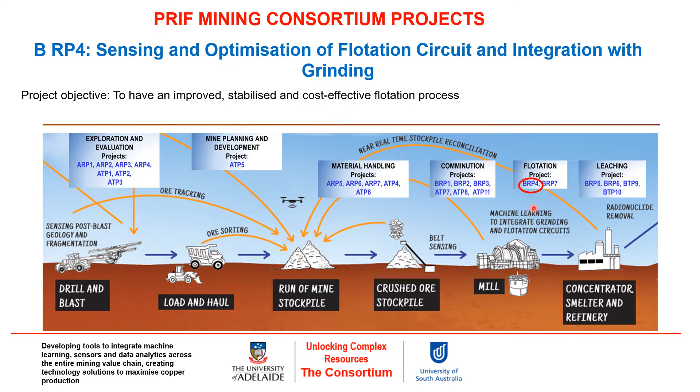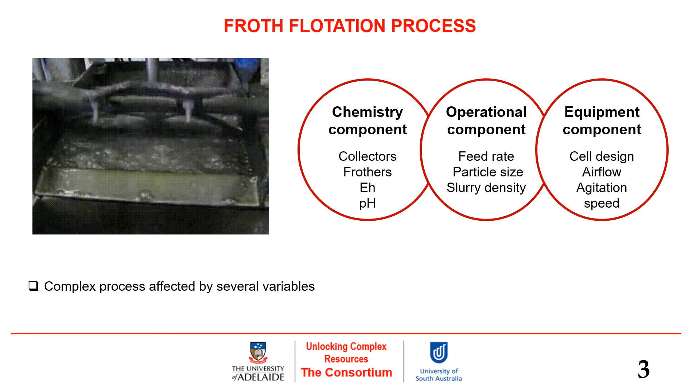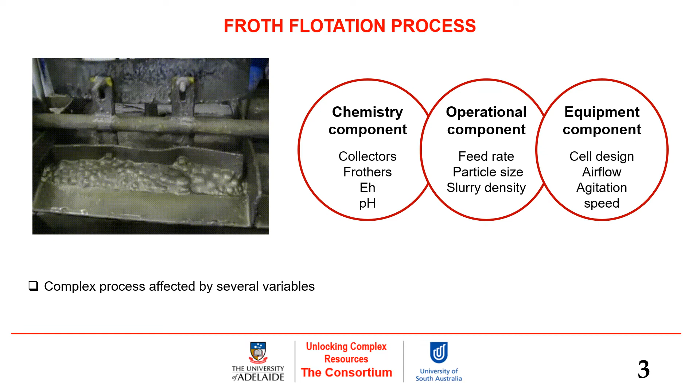Flotation has been the main separation technique that has ensured the sustenance of metals like copper on the resource market. In flotation, we are basically separating minerals based on their difference in surface wettability. No matter how simple this may sound, the process is known to be a complex one affected by several variables, ranging from chemistry components to equipment components.

Recovery and grade are the main key performance indicators, and the goal has always been to achieve the highest recovery at or above targeted grade. However, owing to the complexity of the process and the numerous variables affecting the process, precious minerals are lost to tailings, which leads to the loss of revenue.

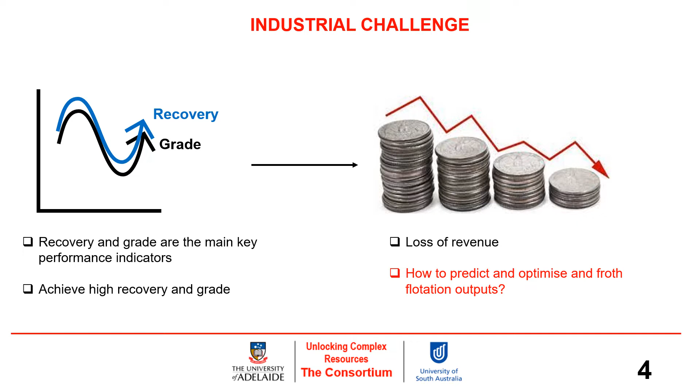Imagine how cool it would be if we had a flotation system that automatically adjusts itself to achieve the expected recovery and grade when there is a change in any of the process variables. Well, for over 10 years now, several research works have been done to predict and optimize the process, as this will form the basis for the full optimization of the process. We intend to solve this industrial challenge with the use of machine learning algorithms.

Machine learning algorithms can capture complex nonlinear relationships among flotation variables, take on more input variables, and they have higher prediction accuracy as compared to conventional modeling techniques. Machine learning algorithms, specifically supervised learners, operate by establishing a correlation structure between input and output variables, and with the use of this correlation structure, make a future prediction.

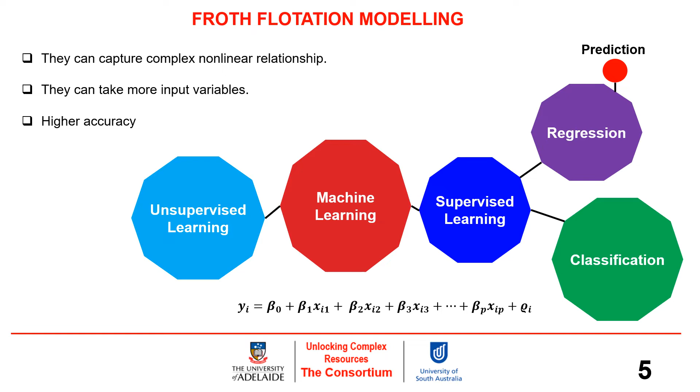Now, using data from the rougher circuit of BHP Olympic Dam, these are our main key findings so far. We have developed a predictive model from relevant rougher flotation variables, and we are able to predict rougher copper recovery and rougher copper concentrate grade using Gaussian process regression algorithm.

Secondly, we extracted the predictive functions of these predictive models, and they were used as the objective functions for the optimization of both rougher copper recovery and rougher copper concentrate grade using Pareto search algorithm, where the non-dominated front was determined. Now the question is how useful these findings could be to the industry.

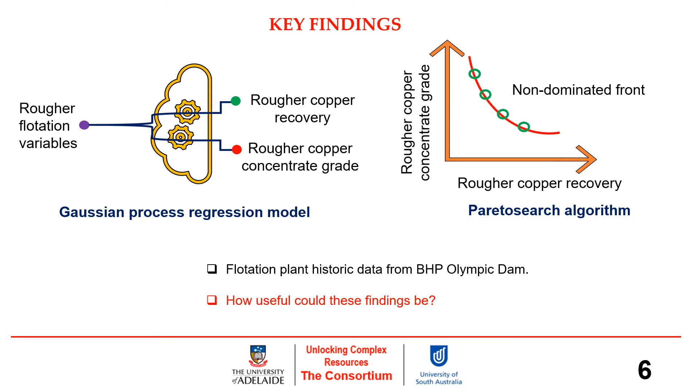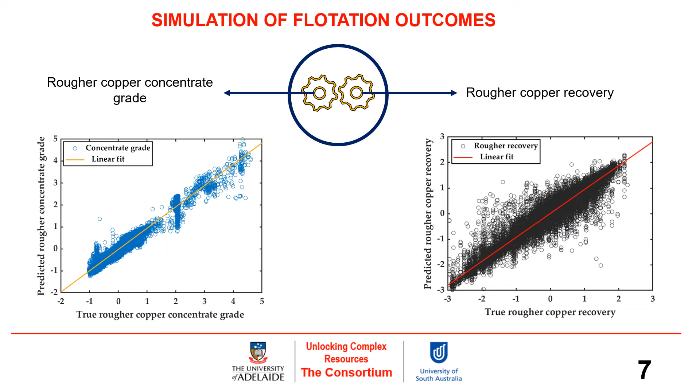Well, first of all, our developed models could be used to simulate rougher copper recovery and rougher copper concentrate grade, respectively. This, when done, would give mineral processing engineers at BHP Olympic Dam an idea of the expected outputs of the process. The figures shown below are true and predicted rougher copper grade and recovery.

The main cause in the fluctuation of the performance of flotation is directly linked to the operation of the numerous process variables at different set points. This implies that once the various rougher flotation variables are operated at their optimal operating values as determined from this project, we expect a more stabilized and improved flotation operation on the mine.

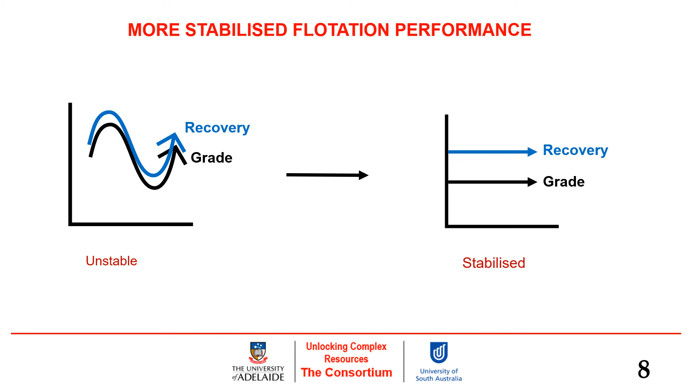Finally, the developed models could be integrated into model-based predictive controllers. Model-based predictive controllers have the ability to anticipate future events and take the necessary intervention. However, the most difficult part in model-based predictive controllers is the development of predictive models, which this work has already addressed.